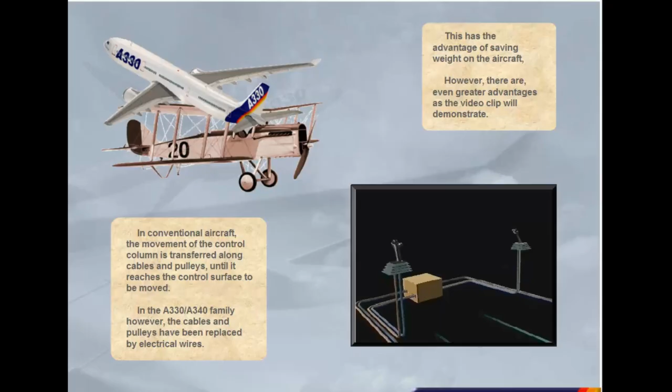The electrical signals created by side stick movement travel through flight control computers before being passed to the flight control surface hydraulic actuators, also named servo controls. These computers analyze the signal to check that it is a safe command and ensure the optimum flight control surface deflection for the demand.

This has advantages over conventional systems. It makes the aircraft extremely stable, enhances safety, reduces the workload of the pilot. Let's now look at the flight control surfaces themselves.

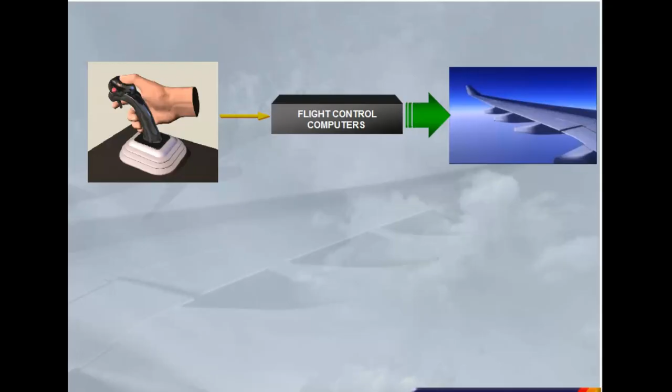The flight control system incorporates ailerons, elevators, a trimmable horizontal stabilizer (THS) for pitch trim, a rudder, ground spoilers, and speed brakes.

Now let's introduce the ECAM flight control page. You can see that all the flight control surfaces we have talked about are displayed. We will now see them in more detail.

The movements of both ailerons and both elevators are symbolized by a green index moving in front of a white scale.

The green rudder symbol is used as an index to display the movements of the rudder on a white scale. The rudder trim is indicated by a small blue line below the scale.

Note that the rudder and the pedal deflections are limited as a function of speed via a rudder travel limiter. The high speed position is indicated by small green lines on the rudder scale. The pitch trim position is indicated by THS deflection in degrees up or down.

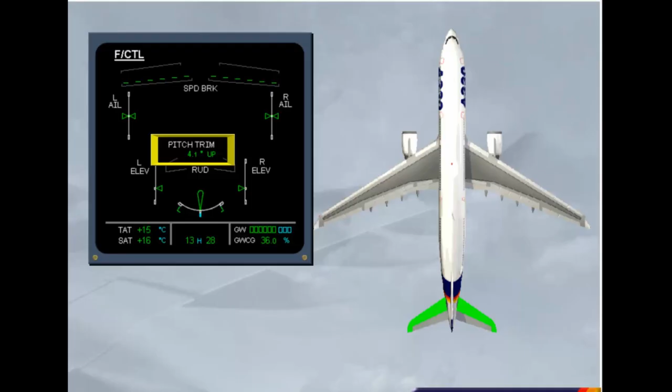Let's continue with the spoilers. The spoilers have several functions. Speed brakes use all the spoilers.

Roll control uses the 5 outer spoilers. On the video, look at the left spoilers as they deploy, then at the right ones as the wings are leveled. Click on the video window to start it.

Ground spoilers use all surfaces. On the video, watch as all the spoilers deploy at touchdown. Click on the video window to start it.

On the ECAM flight control page, the spoiler extended position is indicated by small arrows. This is the speed brake case. All these control surface indications will be explained in more detail in the normal and abnormal operation modules.

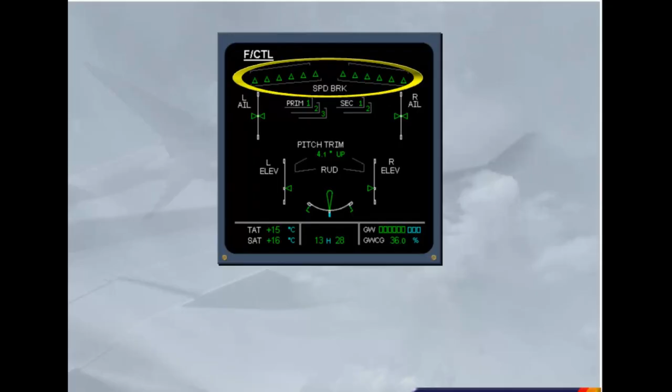Now we will look at the flight control computers. The movements of the flight control surfaces are managed by 5 computers. These are 3 primary computers, PRIM, and 2 secondary computers, SEC.

In addition, 2 flight control data concentrator computers, FCDC, are used to acquire data from the PRIM and SEC. Then, they send it to the EIS.

The status of PRIM and SEC is indicated on the ECAM flight control page. The other computers are not displayed. These indications will be seen in more detail in the abnormal operation module.

Now we will see the hydraulic aspect. 3 independent hydraulic systems are used to power all the flight control surfaces.

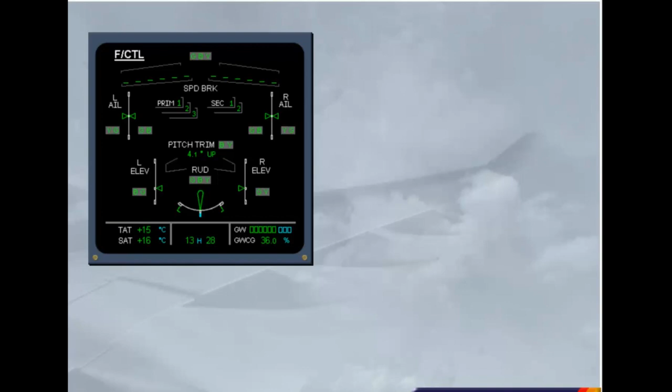The hydraulic systems which actuate each control surface are indicated on the ECAM flight control page by the use of G, B, and Y. For example, the rudder is powered by the green, blue, and yellow hydraulic systems. The ECAM flight control page is now complete.

Pilots control pitch and roll through 2 side sticks. There are associated side stick priority lights. Side sticks and priority lights will be explained in a separate module.

Pitch trim wheels are located on the center pedestal. There are 2 sets of conventional rudder pedals. A rudder trim panel is located on the pedestal. A speed brake lever is located on the left side of the pedestal. In addition, there are 2 panels located on the overhead panel to control the flight control computers.

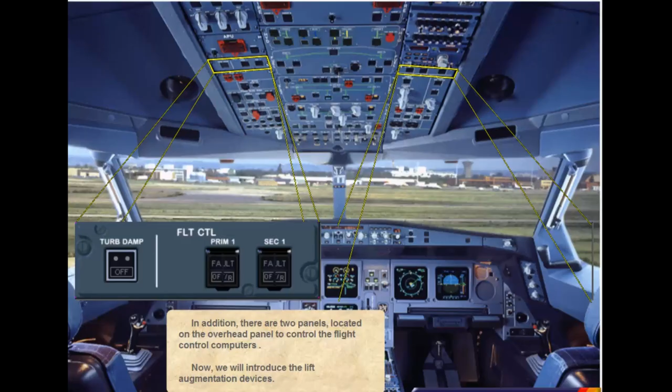Now we will introduce the lift augmentation devices. There are 7 slats on each leading edge and 2 flaps on each trailing edge.

The slats and flaps are hydraulically actuated like all the other surfaces. They are electrically controlled via 2 slat flap control computers, SFCC.

Each SFCC has 2 channels, one for the flaps and one for the slats. Each channel can drive its associated surfaces.

The flap lever, located on the right side of the pedestal, operates the slats and flaps. The flap lever has the following positions: 0, 1, 2, 3, and full.

The flaps and slats information is shown on the engine warning display. The flap and slat positions are indicated by white dots. Here, the surfaces are extended to position 1 plus F.

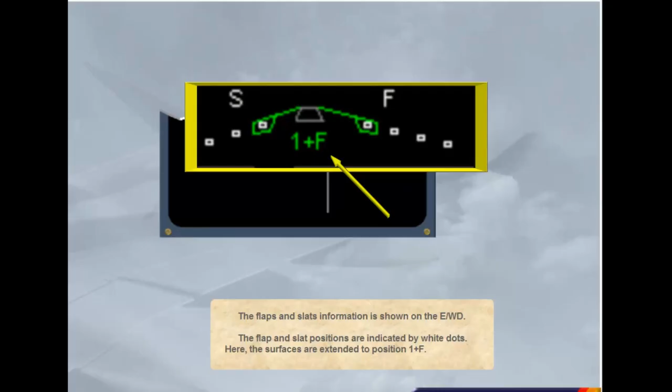The slats and flaps are fitted with protection functions. In particular, surface asymmetry between left and right wing, surface attachment failure, overspeed or uncommanded movement are detected. All these protections will be seen in detail in the abnormal operation modules.

In the A330-A340 family, manual roll and pitch are controlled by the side sticks. They are spring-loaded to neutral and receive no feedback from the flight controls. Movement of one side stick will not cause movement of the other. In this case, as the left side stick is moved, the right side stick remains in the neutral position.

All side stick commands are processed through the flight control computers before being sent to the control surfaces. You can see that as one side stick is pushed forward, the elevators move down in response.

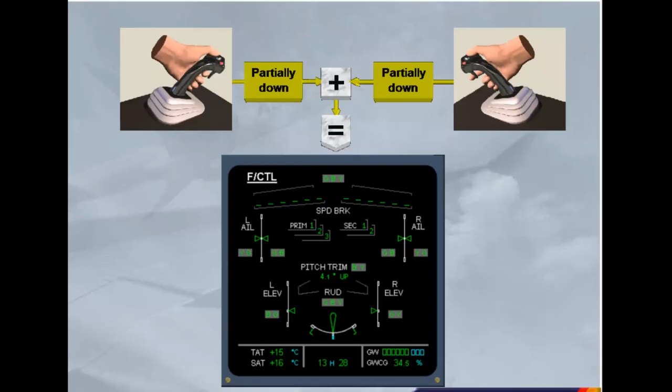When both side sticks are moved in the same way, the total demand is never more than full deflection on only one side stick. Here, as both side sticks are moved forward, the elevators achieve normal full-down deflection, but not more.

When either autopilot is engaged, both side sticks lock into their neutral position. Notice that if a pilot applies sufficient force, the side stick becomes free and the autopilot disengages with audio and visual warnings.

Move the left side stick.

The autopilot has disengaged. The associated audio and visual warnings will continue until canceled by the crew. As you will perform this many times in your simulator sessions, we will now continue with the autopilot disconnect and takeover push button.

The autopilot has been re-engaged for you. Each side stick is fitted with a red autopilot disconnect and side stick takeover push button. By pressing it, a pilot disconnects the autopilot.

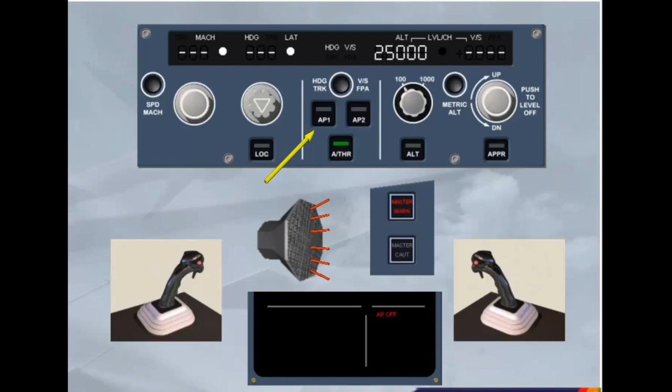Notice on the FCU that the autopilot has disconnected. In this case, the associated audio and visual warnings can be canceled by pressing the autopilot disconnect push button a second time or will stop automatically.

A side stick priority logic is also available. Let's study it in more detail.

By pressing and holding the takeover push button, a pilot can deactivate the opposite side stick. Audio and visual indications are provided to identify which pilot has control of the aircraft.

You are sitting on the left. Take priority. Priority left. You heard the audio warning.

Notice there is also a red side stick priority arrow in front of the first officer, indicating that his side stick is inoperative. The arrow points left, showing that the captain has control.

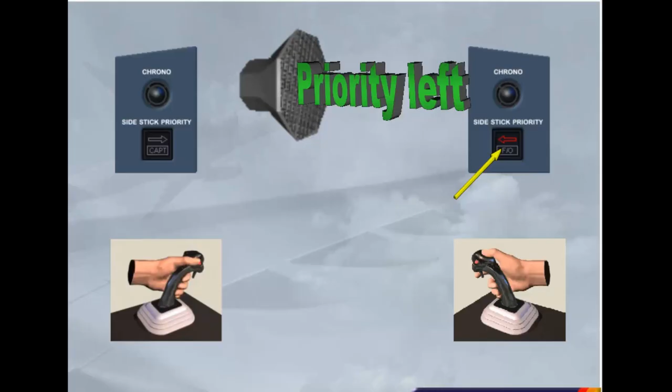To see what happens when the deactivated side stick is moved, move the first officer's side stick.

A green light illuminates in front of the pilot who has control of the aircraft. Here, Captain.

As soon as the deactivated side stick is returned to neutral, the green light extinguishes.

If both pilots press their takeover push button, the last one gets the priority. If it is necessary to deactivate the opposite side stick permanently, press and hold the takeover push button for at least 40 seconds.

To reactivate a permanently deactivated side stick, either pilot has to press his takeover push button momentarily. Notice that both side stick priority lights are extinguished.

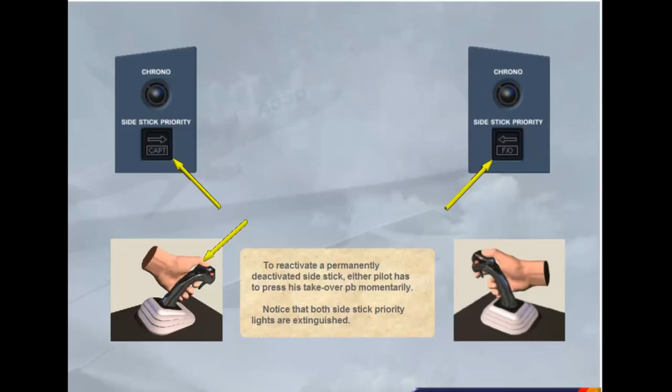Dual input. You heard the audio warning and saw both green side stick priority lights flash, indicating a simultaneous control input.

Simultaneous control inputs are never recommended. If the pilot non-flying must make a control input, he must press his takeover push button.

We will now study the normal law module. In this module, we will be looking at how an A330 pilot and the aircraft computers interface to ensure safe and accurate flight, with minimum workload for the crew.

In this module, we will be looking at how an A330 pilot and the aircraft computers interface to ensure safe and accurate flight, with minimum workload for the crew.

For clarity, most references in this module will be made to manual flight inputs. However, the references apply equally to automatic flight, unless stated otherwise.

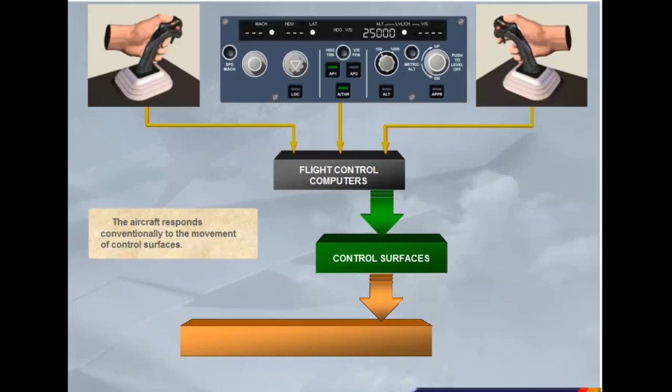Normal law is modified depending on the flight phase. It operates in 3 modes. Ground mode operates on the ground when the aircraft is electrically and hydraulically powered. Controls are conventional.

Flight mode operates in the air after a gradual transition from ground mode just after liftoff. Will be discussed in detail later in this module. Flare mode modifies flight mode to introduce a conventional feel to the landing phase. Will be discussed later in this module.

We will compare a conventional aircraft, an A310, with the fly-by-wire A330 in normal law flight mode. Control surface deflection is directly proportional to control yoke deflection. The same yoke input produces a higher rate of pitch roll at high speed, lower rate of pitch roll at low speed.

Control surface deflection is not directly proportional to side stick deflection. A side stick deflection gives a rate demand to the flight control computers. The flight control computers set control surface deflection to meet the rate demand. For the same side stick input, the control surface deflections will be large at low speed but small at high speed.

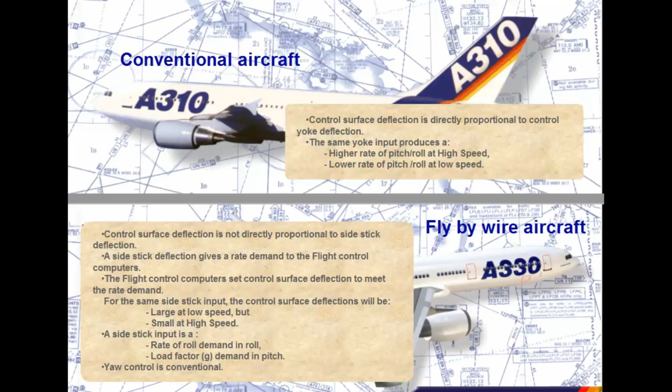Remember, the A330 responds conventionally to the movement of control surfaces. However, unconventionally, the response information is fed back to the flight control computers. The computers process this feedback and adjust control surface deflection to ensure that the maneuver rate demand is executed accurately. This means that control surface deflections may be altered with no change in side stick position.

In flight mode, if, for example, you wish to execute a descending left turn, you set the required attitude and then return the side stick to neutral. The neutral side stick position demands 0 rate of pitch and roll. The flight control computers will maintain the set attitude until you use the side stick to demand an attitude change. Throughout the maneuver, there are no pilot trim inputs.

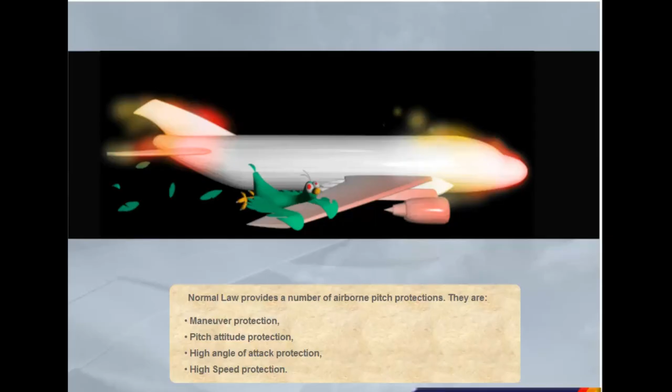Normal law provides a number of airborne pitch protections. They are maneuver protection, pitch attitude protection, high angle of attack protection, high speed protection. In lateral control, there is only one protection, which is for bank angle. Let's take a closer look at these protections.

In a conventional aircraft, pilots must ensure that structural limitations are not exceeded. However, in the A330 family, maneuver protection is available in normal law. Maneuver protection prevents structural overstress by limiting control surface deflections through the flight control computers. Full side stick movement is always available.

The structural limitations vary with configuration. In clean configuration, between positive 2.5 G to negative 1 G, flaps extended between positive 2 G to 0 G.

As with the maneuver protection, if the aircraft reaches the pitch attitude protection nose-up limits, then the flight control computers will override pilot demands and keep the aircraft within the safe flight limits.

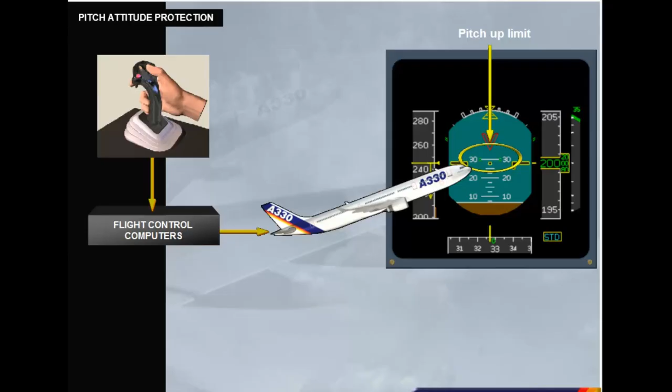The pitch attitude protection limits are shown as small green dashes on the PFD. Note that the pitch-up limits vary between 30 and 25 degrees, depending on the aircraft configuration and speed. In the nose-down case, the computers will limit the nose-down attitude at 15 degrees.

The high angle of attack protection is designed to prevent the aircraft from stalling and to ensure optimum performance in extreme maneuvers, such as wind shear or GPWS warning recovery. This protection takes priority over all others.

This protection displays information against the PFD speed scale. As speed decreases, it reaches VLS, lowest achievable speed with autothrust engaged. With autothrust inoperative or not engaged, the speed can reduce to the first level of angle of attack protection, V alpha prot, which is shown at the top of the amber-black band, barber pole.

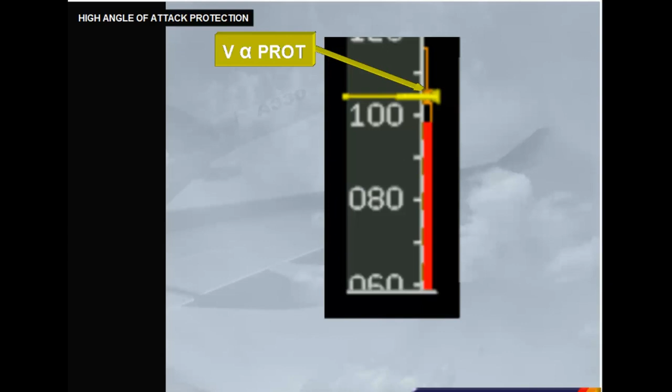The flight control computers will maintain the speed at V alpha prot. If engaged, the autopilot will disconnect.

If the pilots override V alpha prot using the side stick, the speed can reduce to V alpha max. In normal law, the flight control computers will maintain V alpha max, even if a pilot holds a side stick fully aft. Nose-up pitch trim is inhibited.

In the protection range, the normal law demand is modified, and side stick input is an angle of attack demand instead of a load factor demand.

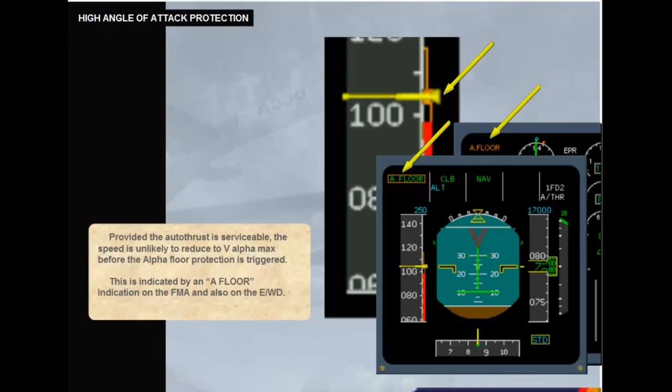Provided the autothrust is serviceable, the speed is unlikely to reduce to V alpha max before the alpha floor protection is triggered. This is indicated by an alpha floor indication on the FMA and also on the engine warning display. If the pilot releases the side stick at V alpha max, the speed will return to and maintain V alpha prot.

The protection we will look at now is the high speed protection. It is designed to prevent the aircraft from exceeding maximum speed. These protection limits are displayed on the PFD speed scale. VMO-MMO is shown at the bottom of the red-black barber pole. Green dashes indicate the speed at which the protection is activated.

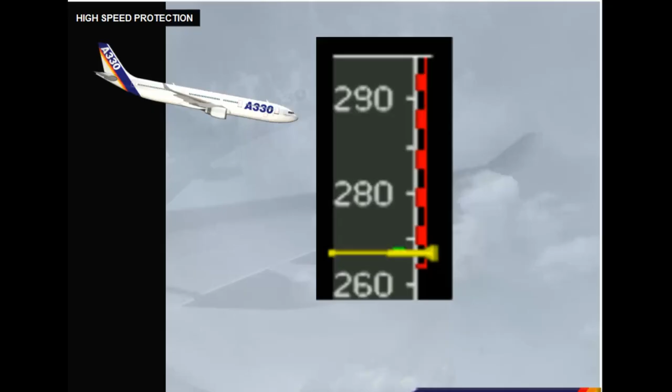When the airspeed Mach increases above the VMO-MMO, an overspeed ECAM warning is triggered, as shown on the autoflight chapter. If the airspeed Mach increases to the protection speed, the autopilot will disengage and the flight control computers send a pitch up command to the control surfaces to prevent further acceleration. The flight control computers will permit this speed to be momentarily exceeded for maneuvering if necessary, but will then return to the protection speed.

Notice that the pilot cannot override the automatic nose pitch-up.

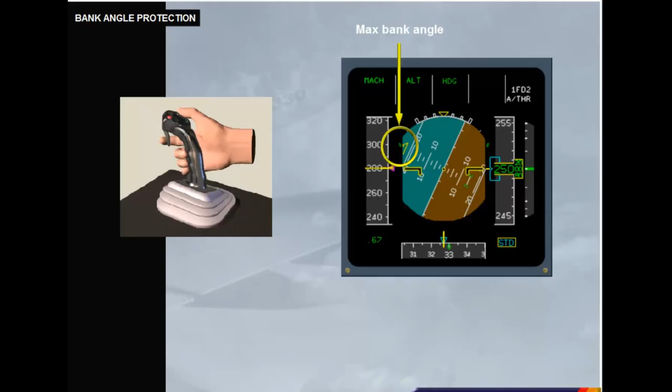Under normal law, bank angle protection limits the angle of bank to 67 degrees, shown by green dashes on the PFD. If the pilot holds full lateral side stick, angle of bank will increase and maintain 67 degrees. The flight director, FD, on the PFD will disappear if the angle of bank exceeds 45 degrees.

If the side stick is released at any time when the bank angle exceeds 33 degrees, the aircraft will return to and maintain 33 degrees bank angle. The FD will be displayed again on the PFD when the angle of bank reduces to less than 40 degrees. Auto trim is inhibited above 33 degrees.

Note, if high speed or angle of attack protections are active, angle of bank is limited to 45 degrees, and the aircraft will return to wings level if the side stick is released.

We will now study the reconfiguration laws in the next module.

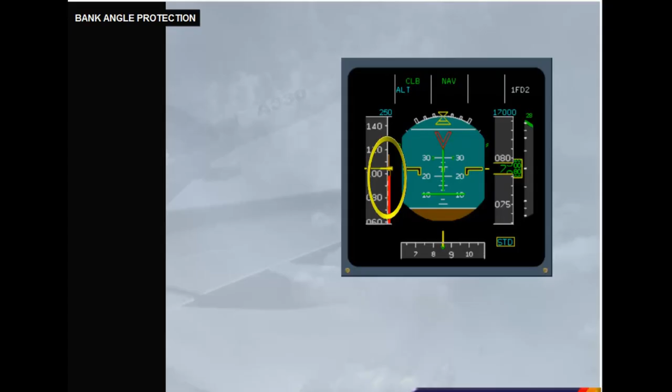A single failure cannot result in the loss of normal law. However, multiple failures of flight control, hydraulic, or electrical systems may result in a degradation of the flight control law. The level of degradation will depend on the severity of the failures. Degradation of the flight control laws is sometimes referred to as reconfiguration. We will study these degraded laws in order of increasing severity.

In alternate law, ground and flare mode are as in normal law. Flight mode, pitch control, load factor demand as in normal law. Roll control, conventional. Surface deflection is proportional to side stick deflection. Roll sensitivity is proportional to airspeed, feels more sensitive. Yaw control. Damping available with limited authority.

Degradation to alternate law is indicated by the ECAM caution: Flight control, alternate law, protection lost. You will see this caution in detail in the abnormal operation module.

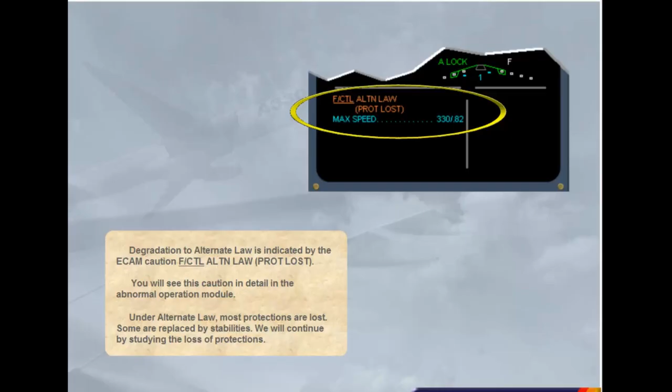Pitch attitude protection is lost, and the flight control computers will not limit the nose up or nose down pitch attitude. On the PFD, the green dashes which mark the protection limits in normal law are replaced by amber crosses. Bank angle protection is lost. On the PFD, the green dashes are replaced by amber crosses.

The maneuver protection is similar to normal law, so we will go straight to the differences between normal and alternate high angle of attack protection.

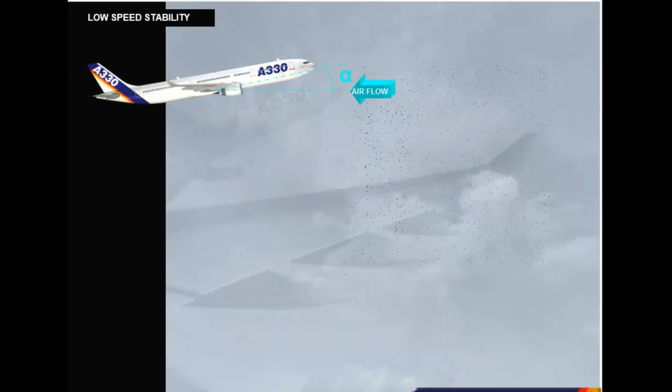In alternate law, the high angle of attack protection is replaced by a low speed stability. V alpha prot and V alpha max are replaced by a stall warning speed, VSW, indicated by a red and black barber pole.

As speed approaches VSW, a gentle progressive nose-down pitch input is introduced to lower the nose and prevent further speed loss. The pitch input can be overridden by pilot input on the side stick. At VSW, an aural stall warning is triggered. The aircraft will stall if the warning is ignored.

Alpha floor protection is inoperative in alternate law.

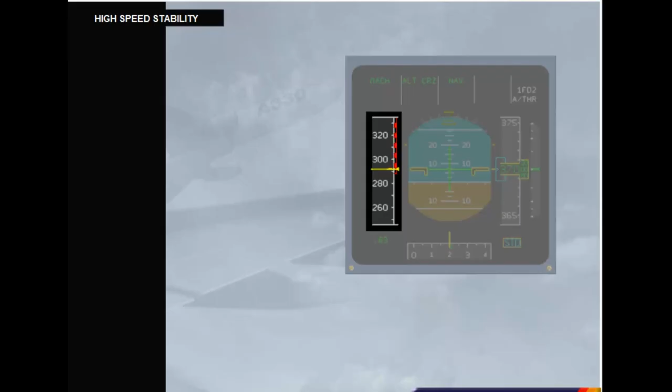In alternate law, high-speed stability replaces high-speed protection. The green dashes are replaced by amber dashes on the speed scale. Above VMO or MMO, a nose-up input is introduced to raise the nose and prevent further speed increase. This pitch tendency can be overridden by the pilots. As in normal law, if VMO-MMO is exceeded, the overspeed warning is triggered.

Note that according to the failures, an alternate law without reduced protections can exist. In this case, only the maneuver protection is provided. The high-speed and low-speed stabilities are also lost. Stall and overspeed warnings are still operative.

Direct law is the lowest level of computer flight control. Pilot inputs are now sent to the control surfaces unmodified. Because of the large number of failures required to degrade to direct law, it is unlikely to occur during normal flight.

In direct law, you will get an ECAM warning as shown, and additional messages on the PFD. We will study them later on.

Direct law, as the name implies, gives a direct relationship between side stick movement and the deflections of all surfaces. In effect, the A330 behaves like a conventional aircraft, and control sensitivity will depend on airspeed.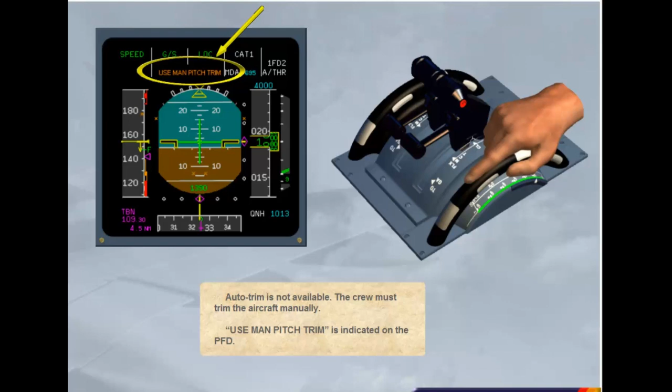Auto turn coordination and Dutch roll damping are also lost. All yaw control in direct law is through the rudder pedals.

In the worst cases of failure, such as complete loss of flight control computer power supply, the aircraft will revert to mechanical backup mode.

In this mode, the only method of pitch control is manual adjustment of the THS using the pitch trim wheel, provided either green or yellow hydraulic system is available. 'Manual pitch trim only' is indicated on the PFD.

Lateral control is achieved in this mode using the rudder pedals and their mechanical linkage to the rudder, provided at least one hydraulic system is available.

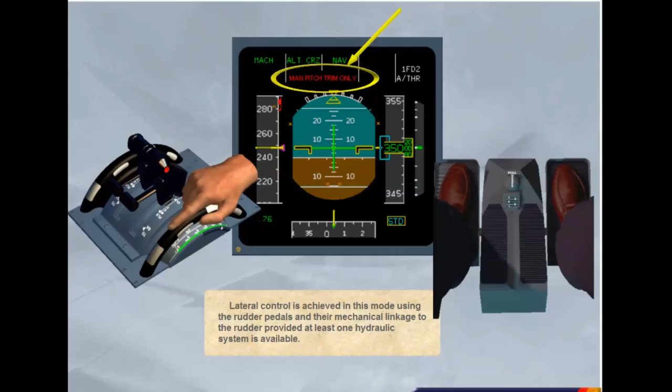In most cases, e.g. by resetting the flight control computer, you will be able to recover from mechanical backup to either alternate or direct law, depending on the type of failure. We will now see a brief summary of the different laws and their associated protections.

In normal law, all the protections are available.

In alternate law, the pitch attitude protection and the bank angle protection are lost. Maneuver protection is kept. High and low speed stabilities are introduced.

In alternate law, without reduced protections, the high speed and the low speed stabilities are also lost. Only the maneuver protection remains.

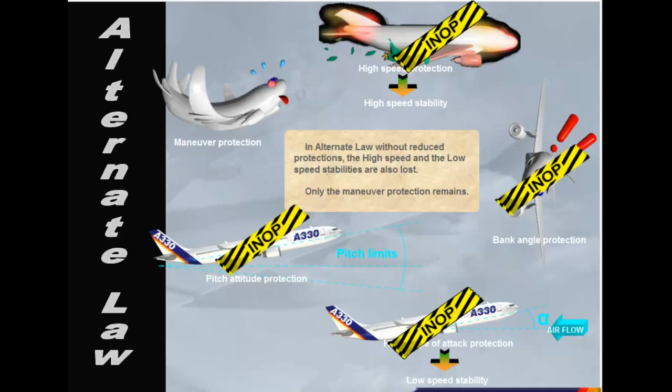In direct law, all the protections are lost and the aircraft is handled as a conventional aircraft.

In mechanical backup, no more flight envelope protection is left. The pitch control is performed via the pitch trim wheel and the lateral control through the rudder pedals, thanks to their mechanical linkages, provided the appropriate hydraulic systems are available.

You have seen all the different laws and protections. Maybe you wonder how to recover if extreme conditions cause the aircraft to leave the protected envelope, e.g., you have been flipped over by very severe turbulence.

Here is the answer. If the limits of normal laws are exceeded, abnormal attitude laws become active. This is a safety feature to ensure that the flight control computers will never prevent the pilots recovering from an abnormal in-flight attitude.

The flight control laws operate in alternate law without protections in pitch, except for load factor protection, and without auto trim. In roll, direct law is provided, with yaw in alternate.

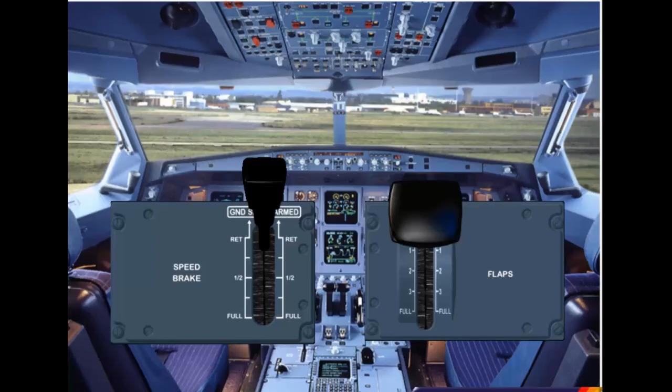Warning: if a flight control surface position does not agree with the lever position, check with the maintenance crew before applying hydraulic power.

During the walk-around, you should ensure that all the flight control surfaces are undamaged and free of any contamination, e.g. snow or ice. The same check is performed on each side of the aircraft.

During the cockpit preparation, the only check associated with the flight controls is to ensure that all flight control computers are in the lights out configuration.

Notice that before engine start, the bank angle protection indicators are displayed in amber on the PFD. The side sticks are inoperative because there is no hydraulic power. Moving the side sticks will not affect the control surfaces.

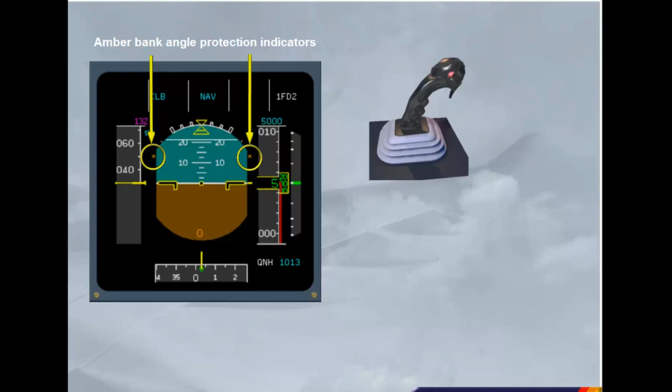Before pushback, for your own comfort, it may be necessary to adjust the position of the seats and the armrests to easily handle the side stick. This is done by using the seat electrical controls and the armrest control knob.

In the same way, it may be necessary to adjust the position of the rudder pedals. This is done using the rudder pedal adjuster.

After engine start, the ground spoilers are armed by pulling the lever out. Lift the speed brake lever. A white band appearing around the base of the speed brake lever and the green memo 'Ground spoiler armed' on the engine warning display indicate that the spoilers are now armed.

Next, the rudder trim is zeroed by pushing the reset push button. Reset the rudder trim.

The trim is now reset to 0. This is checked on the rudder trim panel. It can also be seen on the ECAM flight control page via a blue line displayed below the rudder scale. Note, the rudder trim rotary switch and the reset push button switch are not active during flight with the autopilot engaged.

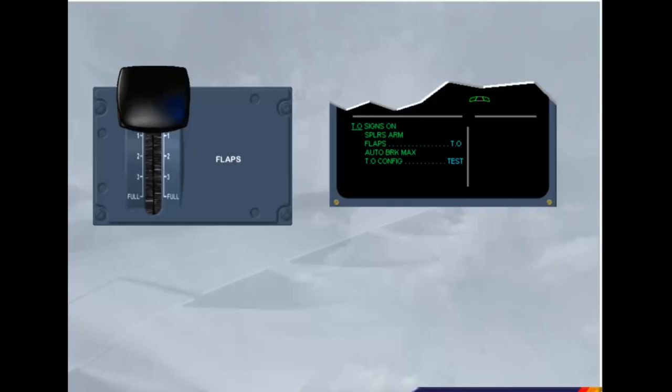The takeoff memo normally appears during taxiing. For training purposes, we have displayed it now. The flaps should be set to their takeoff position, 1 plus F, 2 or 3. While the flaps are deploying, we will be looking at their indications on the engine warning display. To set the flaps, you need to lift up the lower part of the flap lever and then position it to the appropriate setting. Here, as an example, we will select flap 1. Select flap 1.

As soon as a flap selection is made, blue markers appear on the engine warning display to show the selected flap and slat positions. A blue label shows which flap position has been selected. Here, 1. Also, as soon as a flap selection is made, the current flap and slat position green markers move. When the flaps and slats have reached their selected positions, all position indications turn from blue to green. The flaps takeoff memo on the engine warning display turns to green.

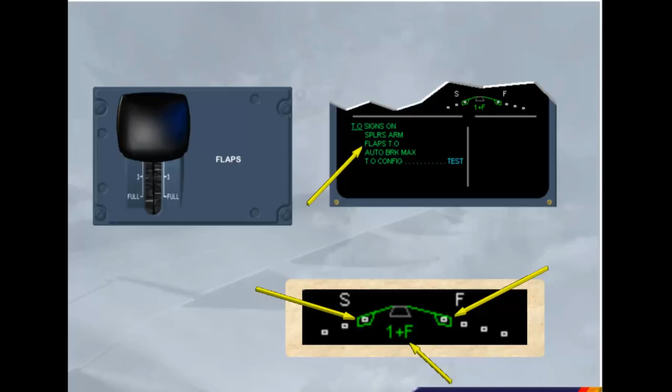Takeoff trim is set manually using the trim wheels. The pitch trim values are indicated on the scales beside the trim wheels. The takeoff trim has to be in the green range. Select either pitch trim wheel. The pitch trim position set may be seen on the ECAM flight control page during the flight control check when taxiing. The after start sequence for flight controls is complete.

When the flaps are extended, the ailerons droop in order to increase lift. For configuration 1 plus F by about 5 degrees, for the other configuration by about 10 degrees. The aileron indexes are now pointing to a small white square which represents the new neutral position.

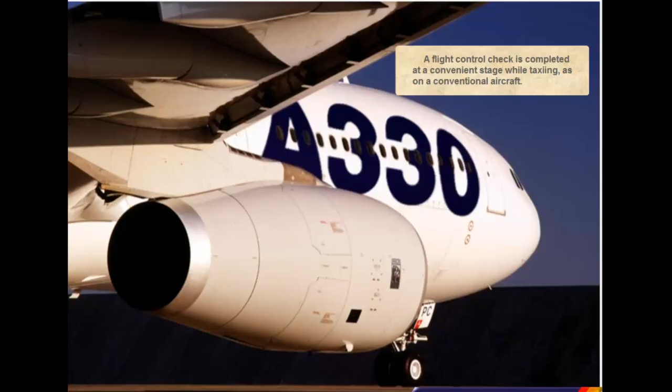A flight control check is completed at a convenient stage while taxiing, as on a conventional aircraft. On the PFD, the combined side stick deflection indicator is displayed as a white cross. The cross only indicates side stick deflections and does not indicate control surface position. The green bank angle protection indicators have also appeared, indicating normal law, as the aircraft is hydraulically powered. The side sticks become operable after first engine start, as soon as hydraulic power is available. On ground, the control surfaces directly respond to movements of the side sticks.

This is the ground mode. As it is not possible to see the flight control surfaces from the cockpit, the reaction to side stick or rudder pedal movement is monitored on the ECAM flight control page. The page is automatically called when either of the side sticks or either of the rudder pedals are moved.

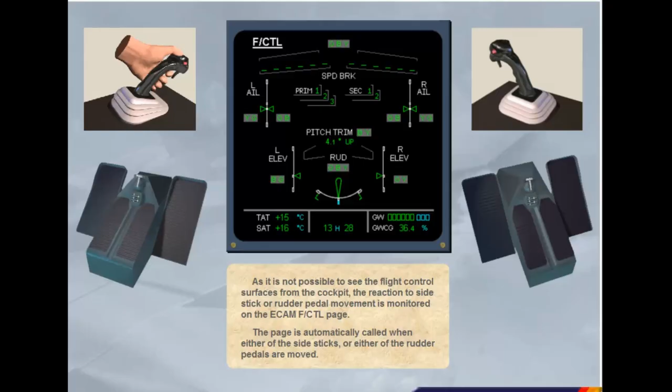We will start the flight control check with the elevators by moving the side stick to its full back position. Move the side stick. The pilot non-flying checks on the ECAM page that the elevators have moved to their full up position. Move the side stick fully forward. The elevators have now moved to their full down deflection. Move the side stick back to neutral. With the side stick neutral, ensure that the elevators have returned to the neutral position. The flight controls are working in pitch.

We will continue by checking the roll control. Move the side stick full left. You can see on the ECAM that the left aileron has moved fully up. The right aileron has moved fully down. The roll spoilers on the left wing have extended. Move the side stick full right. Now you can see that the left aileron is fully down. The right aileron is fully up. The right roll spoilers are extended. Move the side stick back to neutral. With the side stick neutral, ensure that the ailerons return to the neutral position and the spoilers are back in their stowed position. Now we will check the rudder.

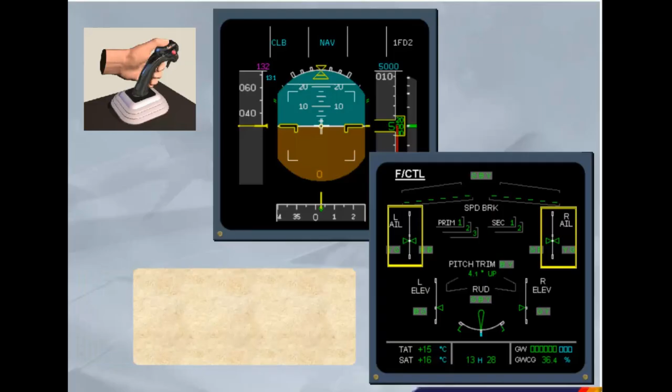Before testing the rudder pedals, you need to press and hold the rudder pedal's disconnect button on the nose wheel steering handle to prevent any unwanted steering inputs. Press the pedal disconnect button. Now the rudder pedal movements will have no effect on the nose wheel steering. The right rudder pedal should now be pushed. Push the right rudder pedal. The rudder has moved to its full right deflection, so you should now push the left rudder pedal. Push the left rudder pedal.

The rudder has moved to its full left deflection, so the pedals should be returned to their neutral position. Release either rudder pedal.

The rudder pedal has returned to the neutral position, so the pedal disconnect button should be released. Release the pedal disconnect button.

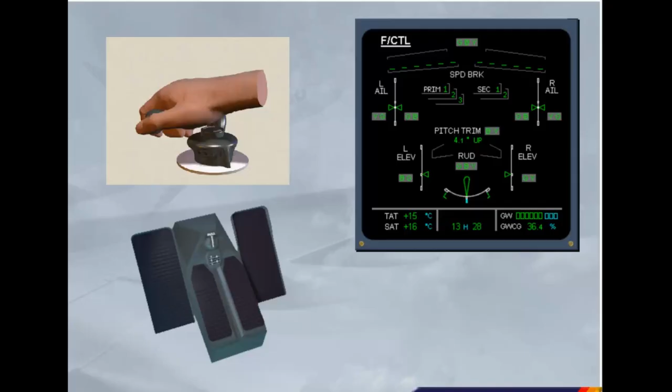The pilot non-flying would now check his side stick for full movement and correct control response. Because the rudder pedals are mechanically linked, it is unnecessary to recheck them. The flight control check is now complete.

After takeoff, the direct relationship between the side sticks and the control surfaces, ground mode, is gradually blended into the flight mode. In flight mode, the pilot, using his side stick, will set an aircraft attitude. With the side stick released, the flight control computers will maintain this attitude.

When the autopilot is engaged, the side sticks are locked in their neutral position and the rudder pedals remain stationary. Neither will move, regardless of any autopilot input.

One of the first actions for the crew after gear retraction is to disarm the ground spoilers. This is achieved by pushing the speed brake lever down. Disarm the ground spoilers.

The white band at the base of the speed brake lever is no longer visible, and the ground spoiler armed message has disappeared from the engine warning display.

For training purposes, let's suppose we have taken off in configuration 2. You are above acceleration altitude with the airspeed increasing. At or above F speed, minimum speed for flap retraction, the flaps can be retracted directly to flap 1.

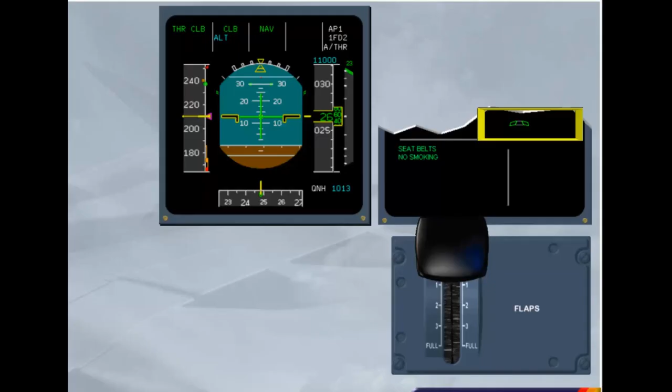The after takeoff actions are now complete. We will go directly to the descent phase.

During descent, the speed brake may be used to increase the rate of descent, to correct the flight profile from above, or to slow down. During the initial approach phase, speed brakes may be used to increase the rate of deceleration.

To use the speed brakes, you must first press down on the speed brake lever, which is spring-loaded into the retract position. Push down on the speed brake lever.

The speed brake lever can now be moved rearwards to any position, depending on the amount of drag required. Move the lever to half position.

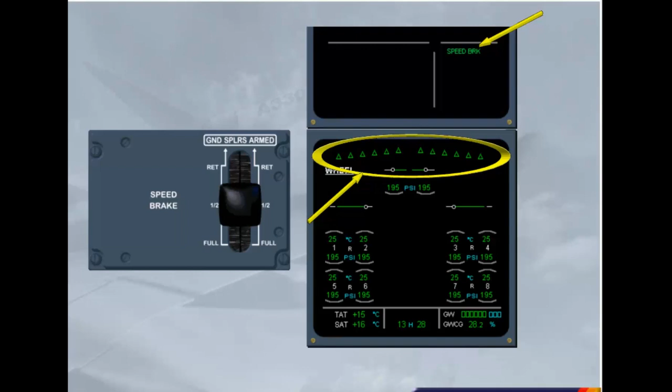For training purposes, we have called the ECAM wheel page for you to remind you of the indications. The indications are also shown on the ECAM flight control page.

We are back to normal display. With some power on at least one engine, the speed brake message will flash amber.

Retract the speed brake. The spoiler retraction can be confirmed on the engine warning display by the absence of the speed brake memo message.

We have activated the approach for you. The airspeed decreases below the maximum speed for flap extension, or VFE, shown on the speed tape by amber dashes.

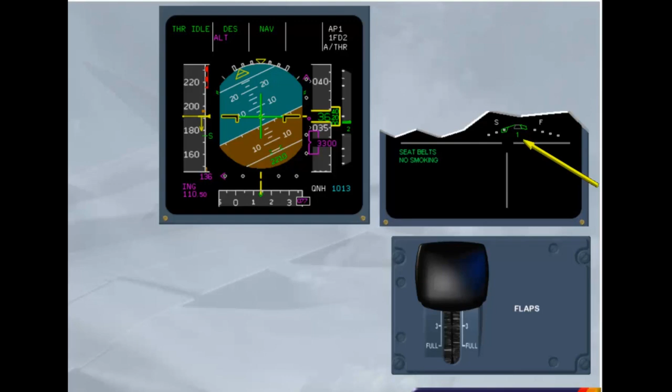Select flap 1. Notice that an airborne selection from flap 0 to flap 1 deploys the slats only. You cannot select flap 1 plus F from flap 0 in the air.

The speed has now decelerated to below VFE for flap 2. Select flap 2. Flap 2 is set.

On the A330, when in Conf 2 or 3, the flap load relief system automatically retracts the flaps to the next further retracted position in case of VFE exceedance by more than 2.5 knots. In this case, the slats are maintained in their present position.

Note: the overspeed activates an aural alarm and ECAM messages that are not presented in this module.

When the speed decreases below VFE by more than 2.5 knots, the flaps return to the selected position.

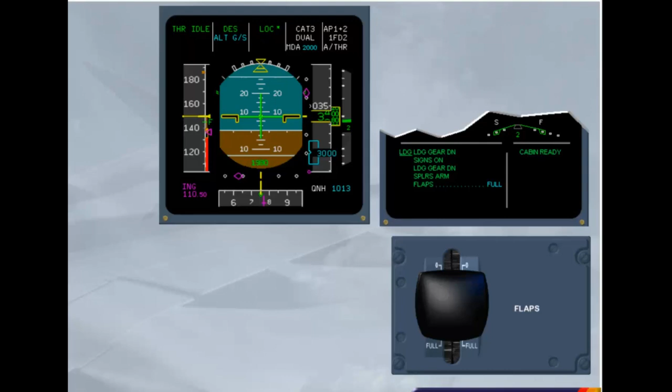Notice that as the landing gear is down, and as we are below 2,000 feet above ground level, the landing memo has appeared.

Below VFE, flap 3 can now be selected. Select flap 3.

Flap 3 is set. Although flap 3 may be used for landing, the normal configuration is flap full. Select flap full. Flap full is set, and the speed is constant at V approach, the final approach speed.

You can check on the landing memo that the aircraft is now fully configured for landing.

Passing 100 feet, the flight mode changes to flare mode. The flare is flown in direct law.

At touchdown, with the main landing gear compressed, the ground spoilers deploy automatically and operate as lift dumpers, provided the thrust levers are at idle or reverse. Spoiler extension can be monitored by the pilot non-flying on the ECAM wheel page.

Note: if only one main landing gear is compressed, the ground spoilers will extend partially, thereby decreasing the lift and compressing both main landing gear legs. Ground spoilers will then deploy fully.

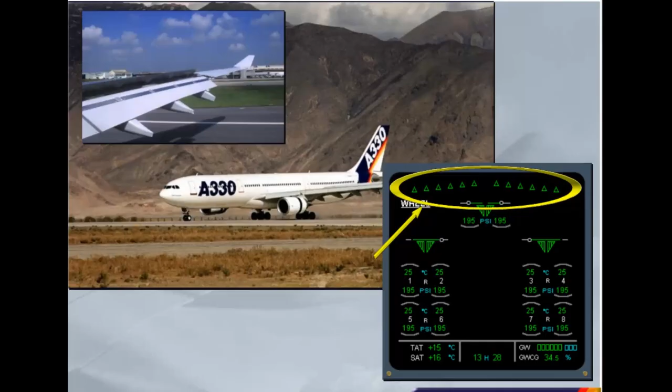If a go-around is performed, the ground spoilers will automatically retract when the power is applied.

As part of the after-landing phase, the ground spoilers should be disarmed. Disarm the ground spoilers.

The flaps should now be retracted. Select flap 0.

This concludes the normal operation of flight controls.

Let's first see the redundancy aspects of the flight controls.

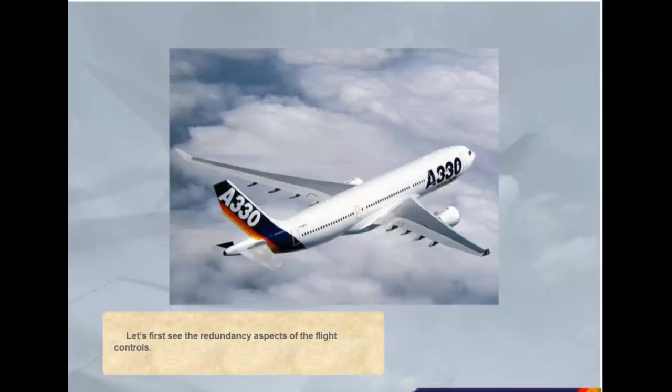In case of a computer failure, the second computer of the same type takes over. Each primary flight control surface is controlled by different hydraulic sources: 2 for the ailerons, elevators, and stabilizer; 3 for the rudder.

Each control surface has an independent actuator for each hydraulic source. Each actuator is controlled by a different computer. One actuator for each surface is always in active mode. The other stays in damping mode and is monitored by its associated computer.

To simplify the schematic, only some computers and a few of their associated links are shown.

We will demonstrate these points in the following SEC 1 failure. Assume you are the pilot non-flying. You are in flight and everything is normal.

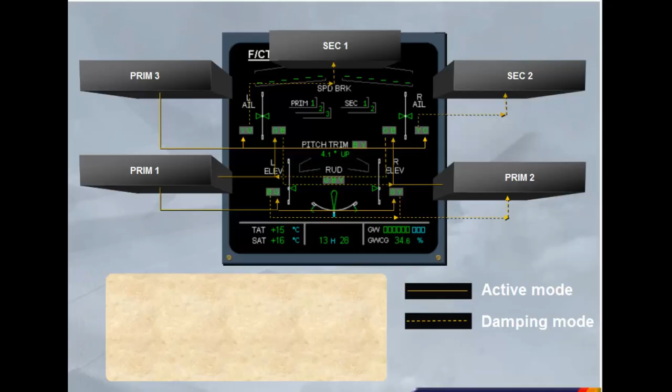Click on the forward arrow to activate the failure. On the engine warning display, read the title of the failure.

Observe SEC indications on the ECAM flight control page. The 1 and the box around SEC 1 are amber. The 2 of SEC 2 remains green, indicating that SEC 2 has taken over automatically.

The indication for the outer aileron actuator, controlled by SEC 1, is partially boxed in amber. This means that if this actuator was in active mode, it would have been automatically switched to damping mode. Here, as it is not the active one, it remains in damping mode.

The active actuator, controlled here by Prim 3, is not boxed on the ECAM flight control page.

Notice also the spoilers affected by the failure of SEC 1 are shown as faulty.

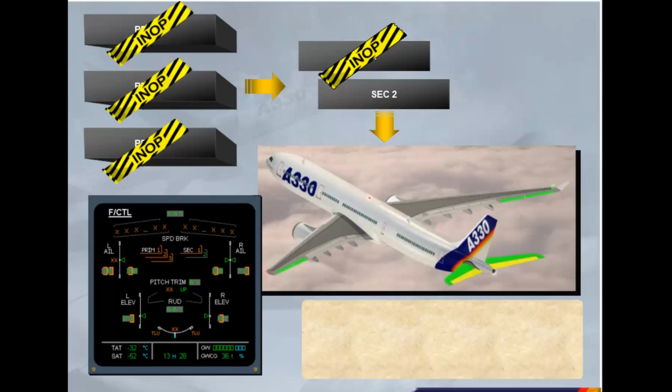Another case of failure is an elevator fault. In this case, the deflection of the remaining one is limited to avoid excessive asymmetrical loads on the tail or rear fuselage, and to reduce the asymmetry effects.

The remaining surface is sufficient to resume normal flight. Provided the appropriate hydraulic systems are available, mechanical control of the THS is always available via the pitch trim wheels.

For the rudder, mechanical control via the rudder pedals is always available, even in case of complete computer failure. This is called the mechanical backup.

Summary. General rules. If a computer fails, the second computer of the same type takes over. Each primary flight control surface is supplied by at least 2 different hydraulic sources. An independent actuator is associated with each hydraulic source for each surface.

Each actuator is controlled by a different computer. For a surface, one actuator is always in active mode, while the others are in damping mode. Ailerons, elevators, THS, rudder: if all three prim computers fail, SEC computers take over.

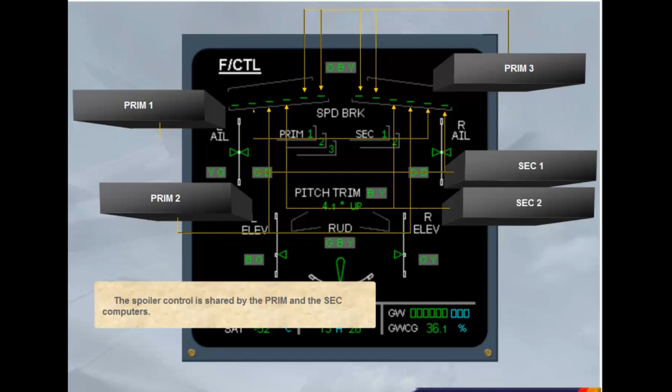We will now see a spoiler fault. Assume we are in descent, speed brakes extended, and no previous fault has occurred. Retract the speed brakes to activate the failure.

On the engine warning display, read the title of the failure.

Observe left spoiler 3 indication in amber on the ECAM flight control page. This indication means that left spoiler 3 has failed in the extended position. The SEC, which controls this spoiler and has detected the fault, will automatically retract it and inhibit the symmetrical one on the other wing, right spoiler 3, also shown in amber.

You can now observe on the ECAM flight control page that spoilers 3 on both wings are retracted and shown in amber. Note that when a spoiler has failed on one wing, the symmetrical one is automatically inhibited except for spoilers 4 and 6.

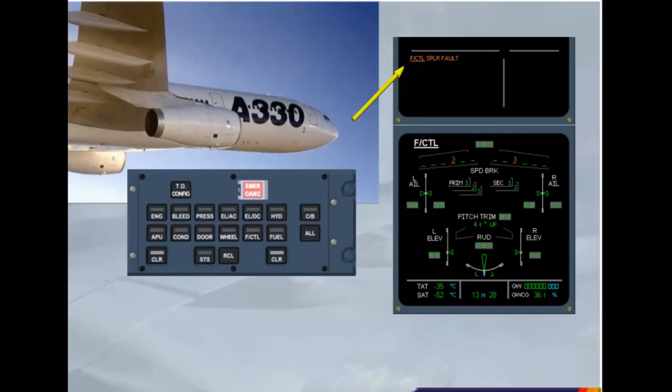The status page is displayed for review. You can see in the inoperative systems column that partial spoilers are now inoperative.

After review and confirmation from the pilot flying, clear status. ECAM actions completed.

We will now review the other spoiler aspects we did not have the opportunity to see when performing the previous procedure.

Under certain circumstances, speed brake extension can be inhibited. In these cases, the spoilers are automatically retracted and stay in this position until the inhibition conditions no longer exist and the lever is reset. A master caution and an ECAM procedure are also triggered.

Each spoiler is fitted with a single actuator, supplied by one of the hydraulic sources. In case of a loss of hydraulic supply, an affected spoiler remains at its current deflection unless pushed down by aerodynamic forces.

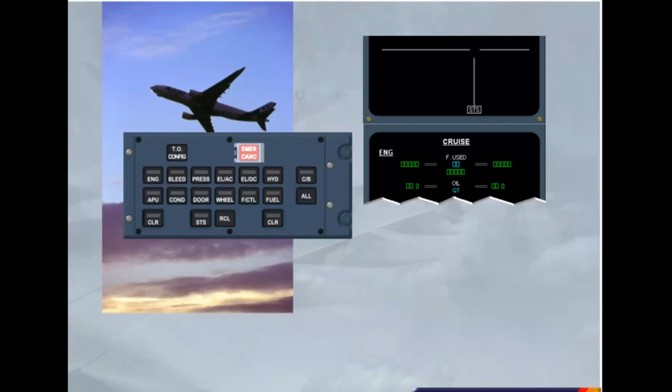On the engine warning display, read the title of the failure.

Observe on the ECAM flight control page that the data normally supplied by FC-DC1 or 2 is no longer available for display and is replaced by amber indications or crosses.

As the procedure recommends not to use the speed brakes above flight level 200, you will have to check the flight control computer status by monitoring the left and right flight control panels on the overhead panel. Here, as no fault lights are illuminated, the other computers are all working.

As no further action is required by the procedure, after review and confirmation from the pilot flying, clear flight control.

The status page is displayed for review. A green message advises us that the flight control indications are lost. You can see in the inoperative systems column that FC-DC 1 and 2 are now inoperative.

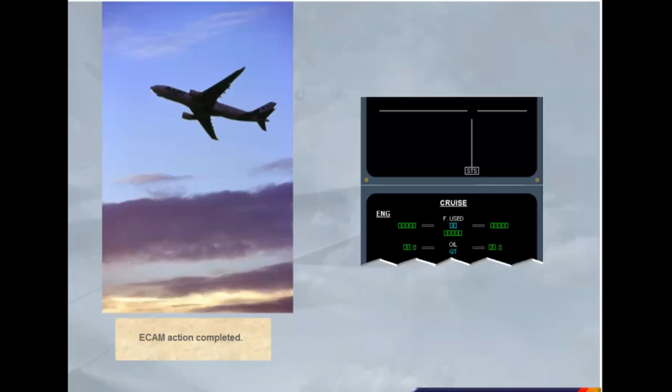You have seen a double FC-DC failure. We will now see a turbulence damping fault.

Assume you are the pilot non-flying. You are in flight and everything is normal. Click on the forward arrow to activate the failure.

On the engine warning display, read the title of the failure. Notice that there are neither oral nor visual warnings, and also that the system page is not called. The turbulence damper function is inoperative.

As no action is required in the procedure, after review and confirmation from the pilot flying, clear flight control. You can see in the inoperative systems column that the turbulence damper is now inoperative.

After review and confirmation from the pilot flying, clear status. ECAM action completed. You have completed the second flight control abnormal module.

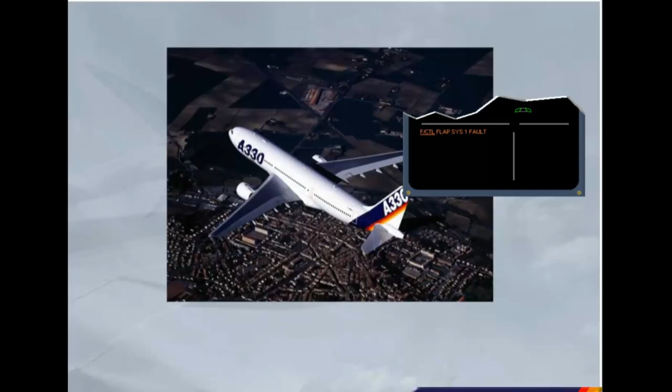Note that there are neither audio nor visual warnings in this case. The title of the failure is displayed on the engine warning display. SFCC1 flap channel is faulty. As the flaps information is displayed on the engine warning display, no system page is called.

As no action is required, after review and confirmation from the pilot flying, clear flight control.

The status page is displayed for review. A cyan message advises us that we will have to switch GPWS flap mode off for the approach. Notice the green information, flaps slow. When an SFCC flap channel is inoperative, the flaps are still available, but they will move at half speed. If the two channels of one SFCC fail, both slats and flaps will operate at half speed.

You can see that no inoperative system is displayed in the inoperative system column. After review and confirmation from the pilot flying, clear status. ECAM action completed.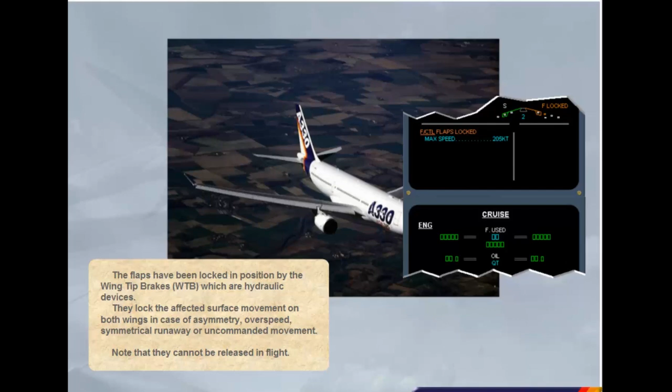If the flap's wingtip brakes are activated, slats operation is still possible, and vice versa. Notice you are restricted to flaps 2, limiting speed. After review and confirmation from the pilot flying, clear flight control.

The status page is displayed for review. The required landing configuration is flap 2. V approach and the landing distance will be increased to compensate for the locked flaps. Use the Quick Reference Handbook to determine the new V approach and landing distance.

You can see in the Inoperative Systems column that the flaps are inoperative. After review and confirmation from the pilot flying, clear status. ECAM action completed. You have seen a flap locked fault.

Let's assume we have no failure. You are the pilot non-flying and we are in approach. Flap 1 has been set and you are ready to set flap 2. Set flap 2.

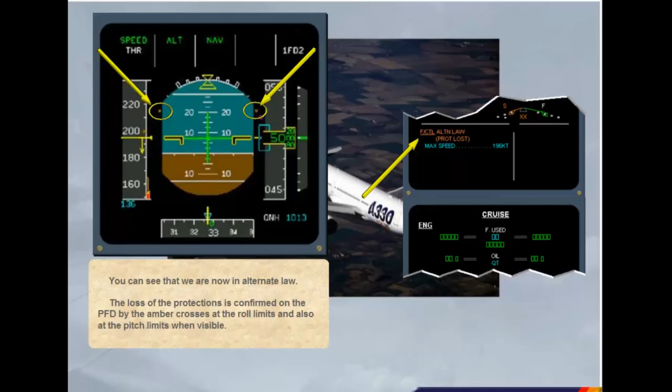After review and confirmation from the pilot flying, clear flight control. The status page is displayed for review. A white approach procedure title shows us the procedure to apply for the approach. In this case, GPWS and flap settings.

V approach and the landing distance will be increased to compensate for the faulty slats. Use the Quick Reference Handbook to determine the resulting landing distance. Observe the confirmation that we are in alternate law. You can see in the Inoperative Systems column that the flight control protections and the slats are inoperative.

After review and confirmation from the pilot flying, clear status. ECAM action completed.

We will now review some other slats and flaps protection features and indications. An amber caution message, flap MCDU disagree, is triggered in case of discrepancy between the real takeoff flap's position and the value entered in the MCDU performance takeoff page.